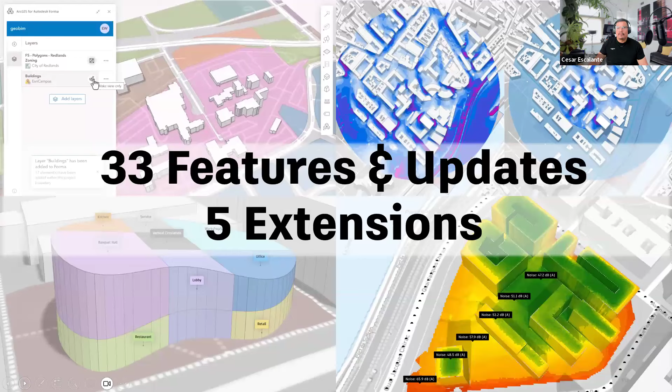All right, this quarter we worked on 33 new features and updates, and 5 new exciting extensions. So with no further ado, let's just dig into it. On the first theme, modeling enhancements. Let's see what's new.

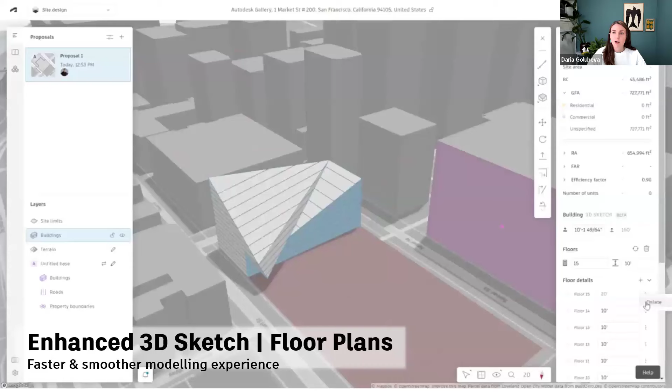Daria? Right, so I'm very excited to start with introducing one of the many updates and improvements that were added to 3D Sketch. So up until recently, 3D Sketch was accessible as a sub-mode from our design toolbar, but now we've made sure to provide you with a more smooth design experience. And it's a ton of improvement to the performance, faster loading times, and just everything to make you more productive when working with this conceptual design tooling.

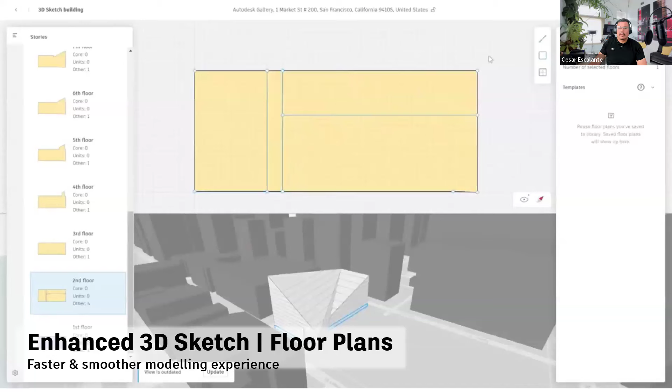And one of the updates that I think is the most valuable is the ability to add floor plans to 3D Sketch buildings. Would you like to add a little bit of flavor to that, Cesar? Yeah, this upgrade improves your ability to represent your program and access more granular metrics, because you can now display what the different spatial requirements are going to be in a floor plan.

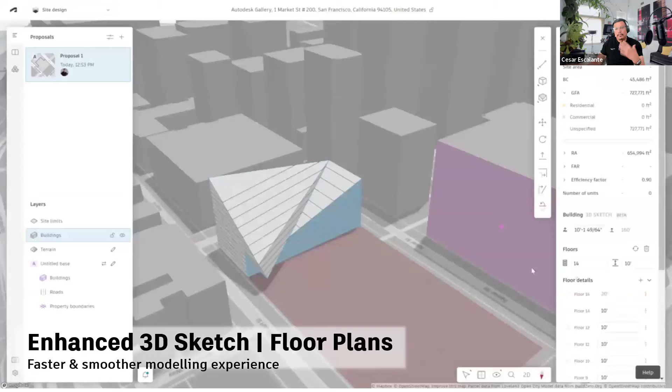You can apply it via floor templates and start understanding the relationship between the floor plan and the exterior skin. And this deeper integration of 3D Sketch means that you can launch projects faster with more consistent graphics and better tooling. And we're very proud about providing you a higher experience in modeling.

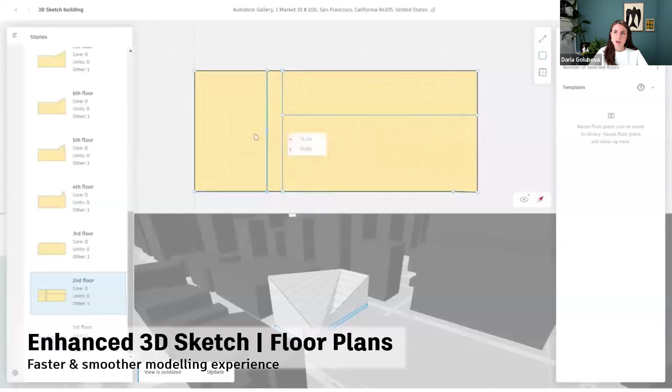Yeah, I wanted to add that previously it was only possible to design floor plans in basic Forma buildings, and we got a lot of feedback that our customers were struggling a little bit with the data loss when converting basic buildings into 3D Sketch, but that's not a problem anymore because floor plans are now part of 3D Sketch buildings as well. Absolutely.

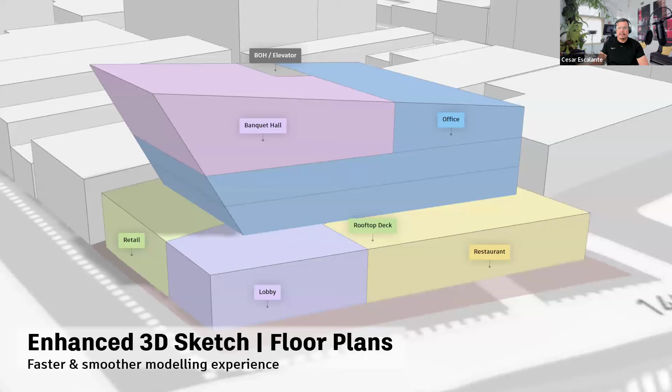That also means that you can create this type of stack representations that are really appealing for communicating design vision with customers. These type of color stack diagrams representing the different programmatic areas of the building are now possible to visualize not only in 2D, but in 3D, and help you understand the vertical and the horizontal relationship of the different space requirements. Take a look, play with it, yeah.

Here is another one, since you can now edit Rhino imports in 3D Sketch. Since we introduced the Rhino plugin, you've been able to use Rhino fluid modeling capabilities and import it into Forma. But the imported elements were a static mesh, and it was incompatible with the parametric capabilities that Forma offers.

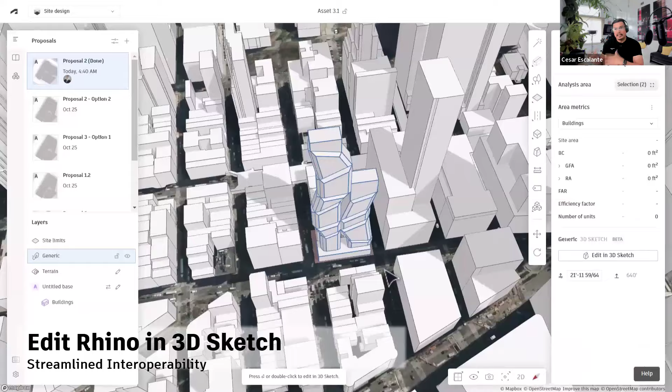But we heard your request, and now we're excited to announce that you can convert an imported Rhino element into a 3D Sketch, and you can take advantage of the full features of 3D Sketch, like adding floors, assigning uses, applying floor plans, calculating area metrics. This is massive, in my opinion, because you can use Rhino as an authoring tool and continue your analysis and metric refinement in Forma.

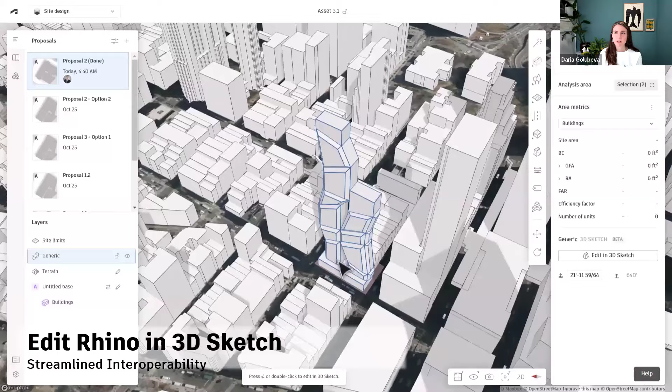I think this is a very exciting update because I see it as a time saver that stands on the intersection of modeling improvements and improvements related to interoperability. And as you said, it will support the downstream operations, such as getting statistics in area metrics and taking advantage of the analysis, and combined with the previously presented updates, you can enrich Rhino buildings with floor plans, which I think is quite exciting.

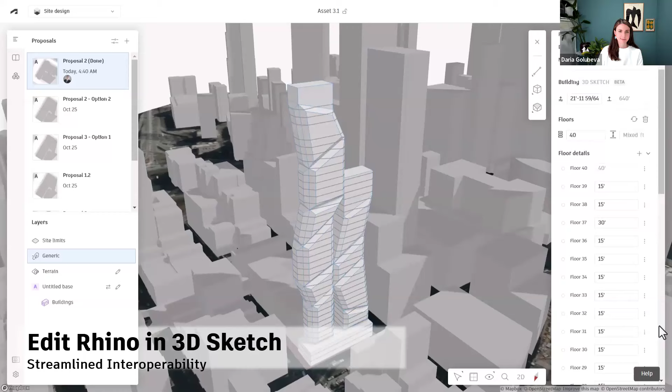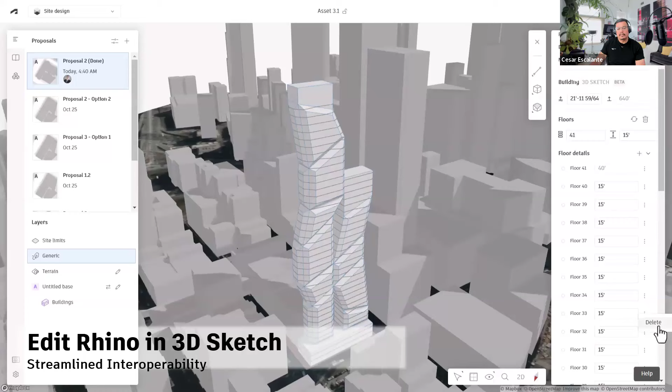There's a nuance requirement. I think the import needs to be a closed manifold geometry to take full advantage of the features. If you, for example, just bring a set of disconnected planes, I don't think 3D Sketch is going to recognize it as a closed solid, so just make sure that when you do this, the Rhino model is properly set up.

There's also a few additional modeling enhancements. You can resize the 3D Sketch solid primitives before placement. These allow you to adjust the size of the basic shapes in the initial state of the modeling, and you can adjust it later on. Another thing, you can delete individual 3D Sketch floors. Previously, it was a bit of a hassle because you needed to adjust floor heights manually using push and pull operations, but now you can simply delete the floor.

And third, we have made significant improvements in the snapping performance when modeling, with a 20-times increase in speed when you snap to certain elements, making the modeling experience faster and more responsive. Kudos to our conceptual design team.

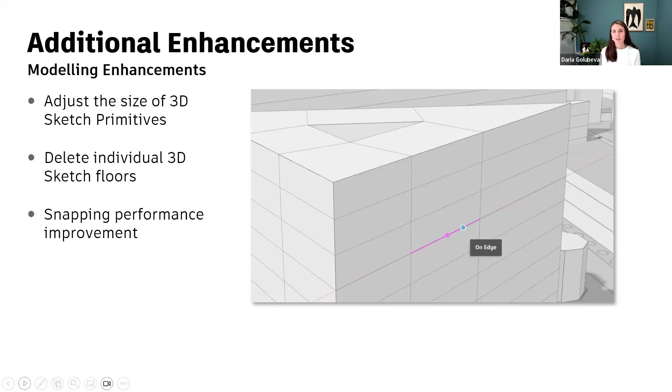And I think they labeled this as a tiny improvement, but I think it's quite a handy, even though small, productivity improvement. When drawing with 3D Sketch tools, you can now switch between the tools on the fly. You can either use the toolbar or a shortcut so that you can create continuous sketches without losing momentum, because sometimes it can be just annoying. Where is that tool? So now just use a shortcut and have this continuous tooling experience. Exactly, and expect more of these enhancements in the upcoming quarters as well.

Sorry. All right. Super exciting, something that was announced in Autodesk University. If some of you were lucky to attend it, I wasn't, so I had massive FOMO watching the keynotes and other presentations virtually from Norway.

But it was announced that Forma is now integrated with Autodesk Docs, and our own whiteboard solution, Forma Board, is pioneering this integration. So until recently, it was possible to paste a link to a file from Autodesk Docs, but now you can also use the handy file browser to choose a file, and then it will be represented on your whiteboard as this very visual thumbnail that you can also open from the board.

That's right, Daria. And this is just the beginning of our strategy to create a seamless experience between Forma and the Autodesk Construction Cloud. Stay tuned for more exciting integration coming up. And by the way, if you haven't checked out Forma Board yet, I think now is the time.

As I mentioned, it's an interactive whiteboard where you can pull different context pieces. So for example, analysis or snapshots of your proposal, and now files from Autodesk Docs to put together this design story, or present to your stakeholders, or just highlight the key parts of your process that you think would be interesting to share with your stakeholders.

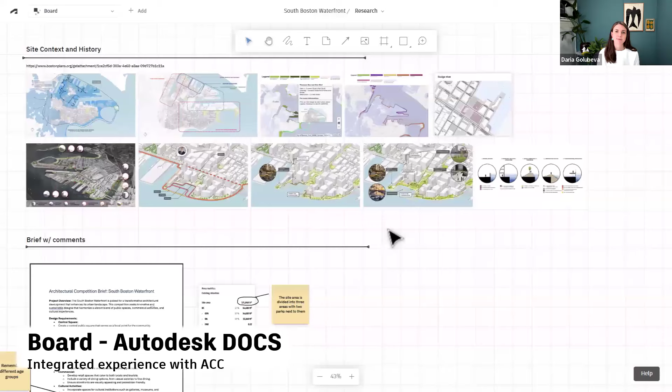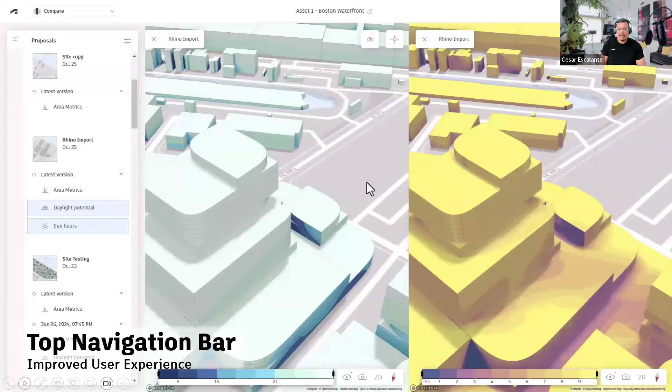All right, as we prepare to transition from Forma the app to Forma the platform, we introduce a new top navigation bar designed to be more intuitive and more user-friendly, and help you to switch workspace between all the different Forma display modes, like board, site design, and analysis compare. I think this is the start of a much richer navigation experience as we expand Forma capabilities.

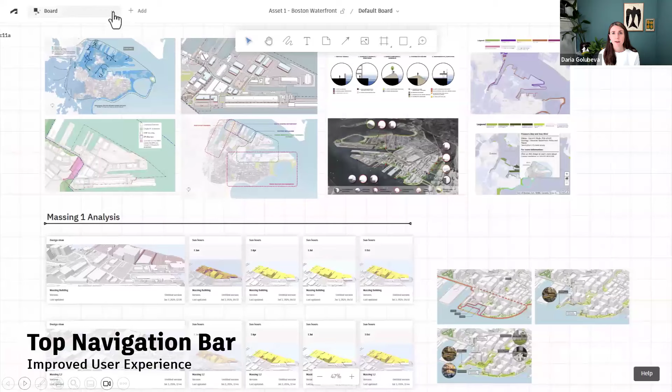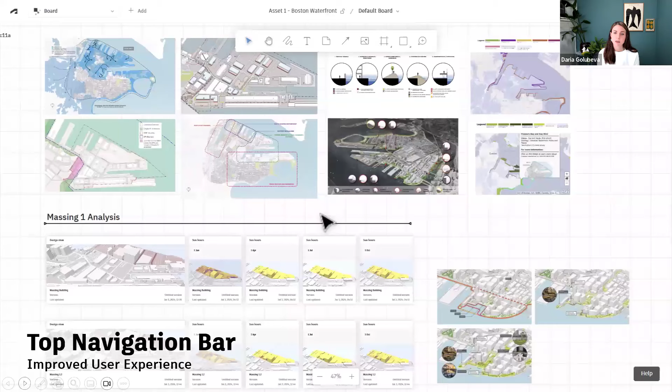Right. So now this, what we call the mode picker in the upper left corner, will help you access different product areas much quicker, and we're preparing for a more scalable solution as we will connect to more tools out of Forma. And there are some more navigation changes that are lined up, but I just wanted to comment that we're trying to release it gradually so that you don't have to relearn workflows or get introduced to a button that was placed somewhere else suddenly.

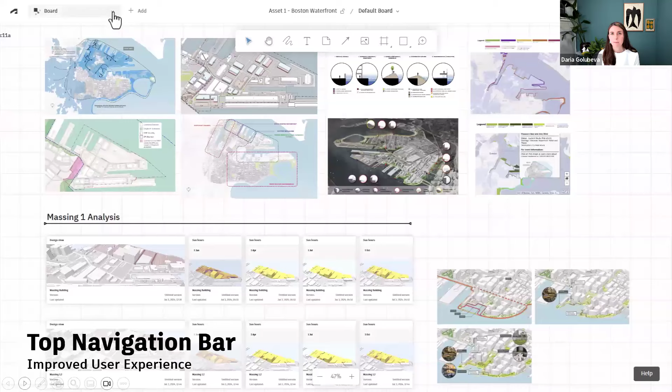So we will be sending in-app updates to gradually introduce you to these changes, and you can get accustomed to them. This is the first step in a bunch of updates in the Forma navigation that will hopefully make it even easier to go between different parts of the product interface. Such a good improvement. Great. Let's take the next one.

We make it easier to collaborate and communicate with board, but now we can add comments directly on the board space. You just pick a point in the board environment and leave detailed feedback and suggestions where they matter. The other thing is that you can also mention team members by using the @ symbol to mention a specific team member in the comments. These members will receive a notification via email.

This makes the design process more efficient by tracking conversation and keeping a history of the conversation on a side panel. Right, and as I mentioned, the board is all about storytelling, and it's about sharing your design process with others. So we hope that comments and mentions will enhance this collaborative offering. And in this sense, I would say that Forma board is becoming this flagship collaborative space within a Forma project.

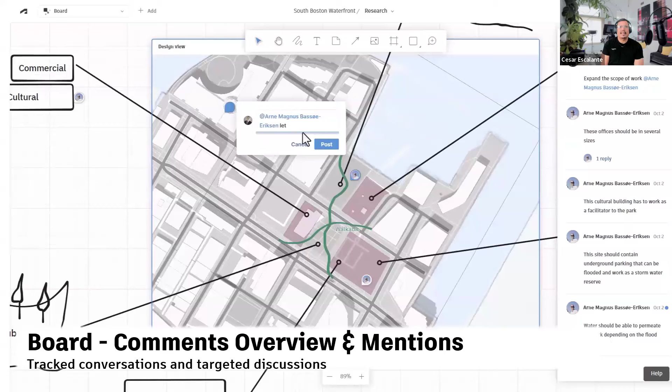And now you can also invite someone to have a look at your board by tagging them in a comment. This is reminiscent of the Microsoft review comments, where you can tag a person and draw a colleague's attention by sending them an email notification. We do this all the time, right, Daria? Yes, indeed. And it's important to get some context about what's being discussed so that when you jump into it, you get all the details and you're prepared. Yeah.

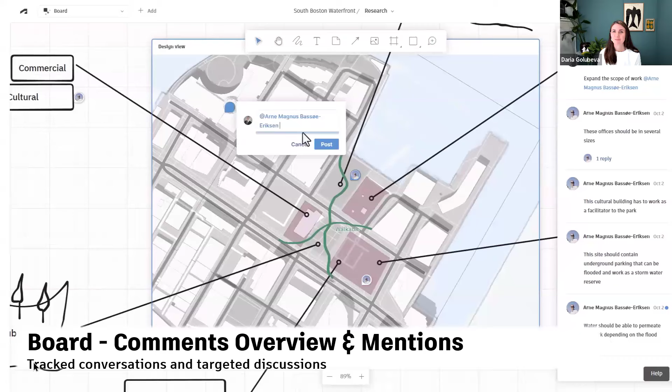All right. Project invitation messages, Daria. Right. Speaking of context, that ties in nicely to the previous point. We added a small improvement, but I think it can be very useful. So when you're inviting a new member to join your project, or if you would like them to look at the board within your Forma project, you can add a custom message that will be included in the invitation email. So for example, what is it exactly that you would like them to have a look at? And by that, you provide the context that will prepare them before logging in to Forma.

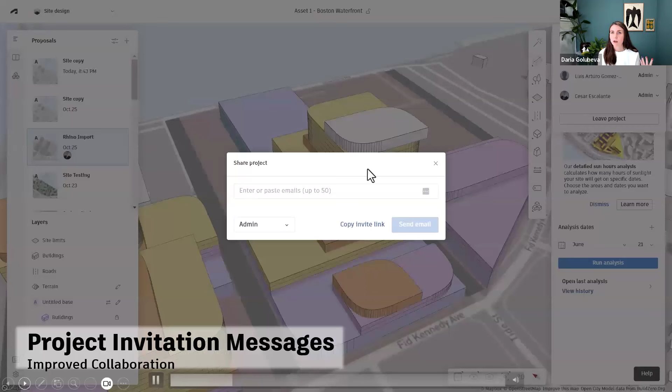And I must say that I really appreciated that as a user when someone on my team wanted to test a feature with me, and they sent me an invitation that included a note. Even though I had a look at that a couple of days later, that immediately brought back the conversation that we had. So I knew exactly what I was expected to check out in that project, and I found it very helpful.

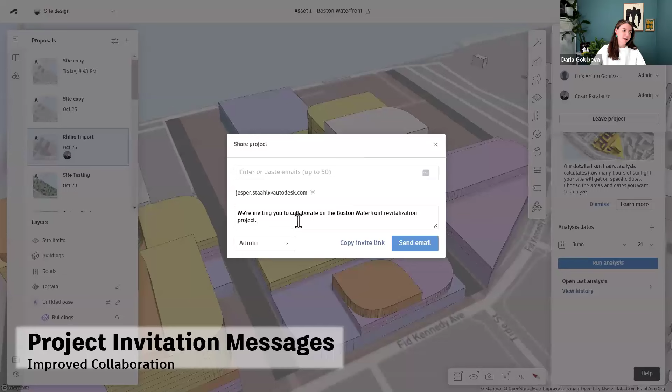Yeah, and who doesn't like to receive a personal touch in your invitations, right? I think it improves the collaboration, team spirit. Yeah, I think it sounds a little bit more like a natural work conversation rather than that email coming from a brand. Correct.

All right, let's take a look at additional collaboration updates. This is a nice one, the ability to duplicate a project from the projects tab in your hubs page.

Maybe I could add a couple of words about that, because it was something the product team I was on worked on. It was a common request because sometimes you might want to reuse parts of your project almost as a template, or sometimes you'd like to share projects with different groups of people, and duplicating the project allows you to quickly prepare for these use cases.

Nice. The other one is that when you create a new board, it displays a starting template. It makes it easier for new users to get started on board features and set up projects from the start. And then the last one is that you can also choose different aspect ratios for your frames, to customize your presentation layout for different device screens or control different print formats.

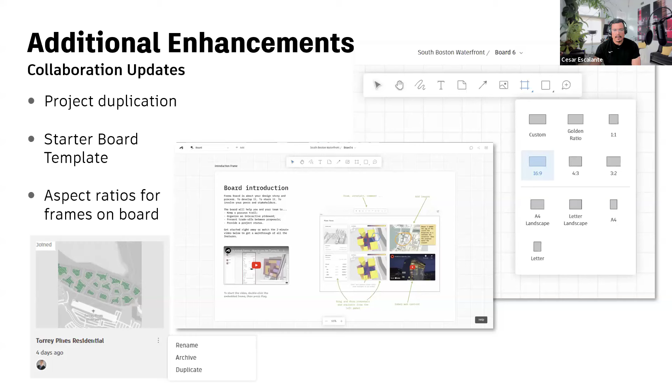We are listening to your requests and adapting these Forma enhancements accordingly.

All right. Next section is just as exciting. Exactly, analysis and simulation. There's a bunch of improvements. Let's take a look.

We're starting by announcing that our noise analysis has graduated out of beta. I know beta might be a bit of a technical term, but if something graduated out of beta, it means we have higher confidence that it performs better, and we've spent extra time and effort validating the results as well as improving performance. So noise analysis is there to help you make the right decisions by taking noise conditions into account.

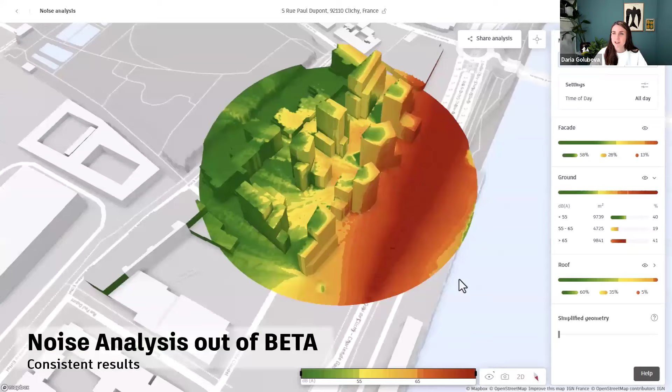Yeah, and this is one of my favorite analyses. I think as a designer, in early stage design, you can speak very confidently about some noise predictions in your design without needing to involve a sound specialist or a traffic specialist.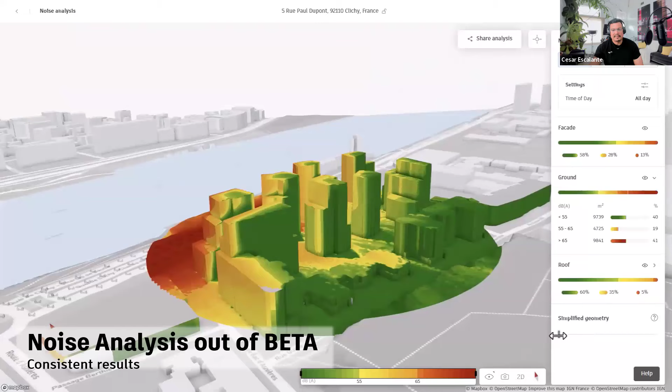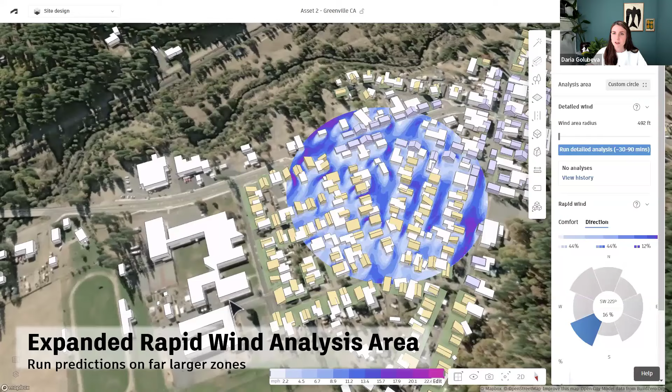By the way, just recently we added some instructions in the noise analysis. So if you haven't used it before, you can check out the steps, because in order to use the noise analysis you'll have to add the traffic data, but we tried to communicate it as simply as possible so you can just complete those steps and get going with this analysis.

Back to you, Cesar. Yeah, rapid wind analysis - we have increased the prediction accuracy, which allows us to increase the target area of the analysis as well. Now the target area is almost a 2,300 foot diameter circle. This is particularly useful when analyzing large scale projects with various different wind conditions.

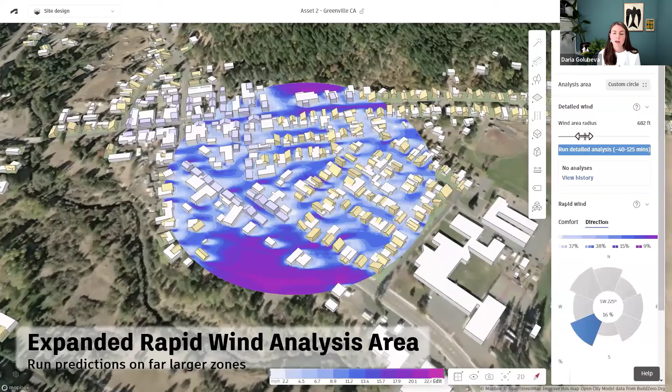Could I take 30 seconds to briefly talk about rapid and detailed analysis, in case someone is new to Forma? Sure, I'll do that. In Forma, there's a bunch of analysis we call rapid analysis. They update in real time while you're making design changes to your model. This allows you to get directional input into how you might modify the model further. It's less precise, but immediately accessible in the right panel, and can inform your further design decisions.

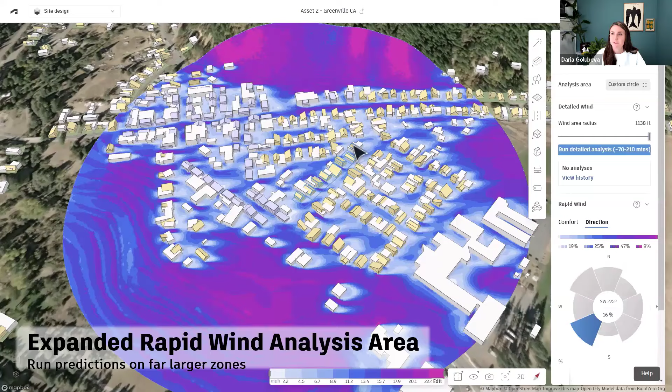And for in-depth results, you might want to use detailed analysis - that's correct, and this is different from the detailed analysis, right Daria? Yeah, correct. Commonly, the detailed analysis takes a longer time to complete, and the calculation is based on a different model. But if you click those question marks in the right panel, you can read up about the specific technology, written by our product teams in a very comprehensive way.

On the daylight potential analysis front, we've improved the daylight analysis tool to allow for more granular statistics. You can now click on a surface and display the daylight metrics impacting that particular surface. We've also introduced a detailed analysis statistics panel that helps you compare quantitative results more easily, and the ability to filter results by different surface types, like floors, roofs, facade, and other - 'other' being surfaces that are not either vertical or horizontal.

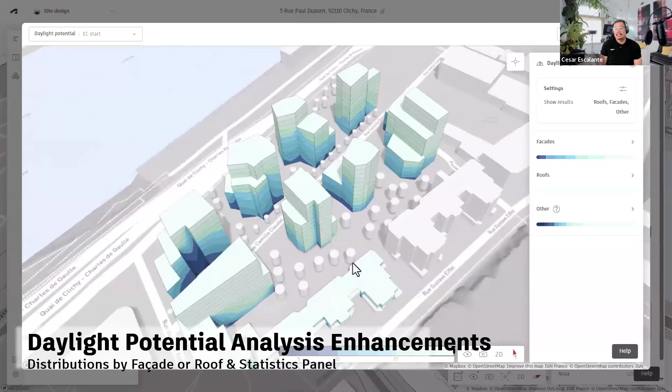This is the type of feedback you may need to be very specific about the type of facade system you need to design, or to optimize window placement in your building. Having the statistics in the right panel was a request we heard from many of our customers, and we made it happen - previously the daylight potential analysis results were just a visualization on the model, but now you can get specific numbers, and communicate analysis results to stakeholders even if they're not a Forma user.

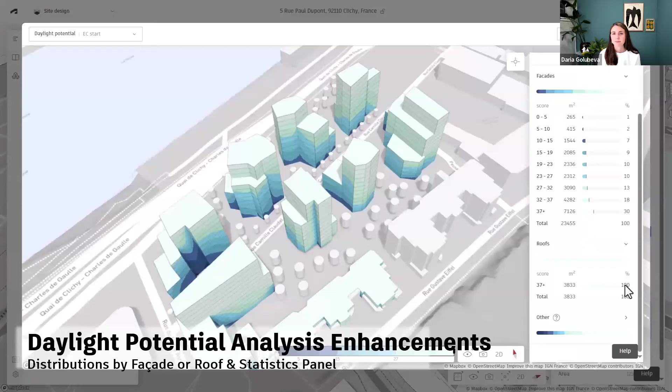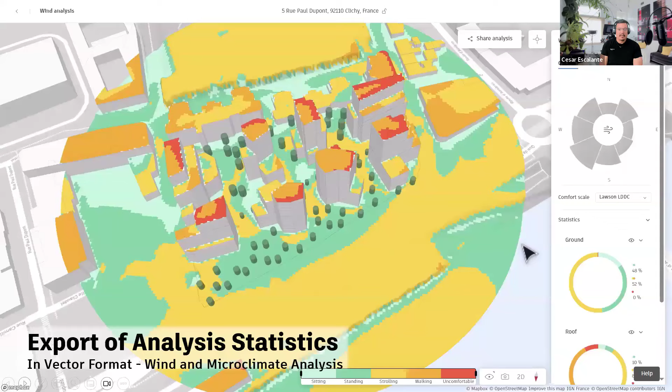This is a minor but very impactful feature: the ability to export wind and microclimate analysis results as SVG or PDF files. This allows you to extract the analysis results and integrate them into downstream documentation workflows. For example, if you're using Adobe Photoshop or InDesign, you can move those analysis results and create custom reports and presentations, ensuring your analysis results are clearly communicated. And because they are in vector format, the quality of the images is very high.

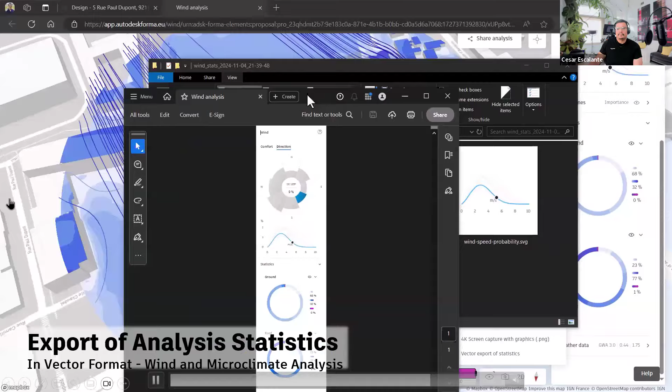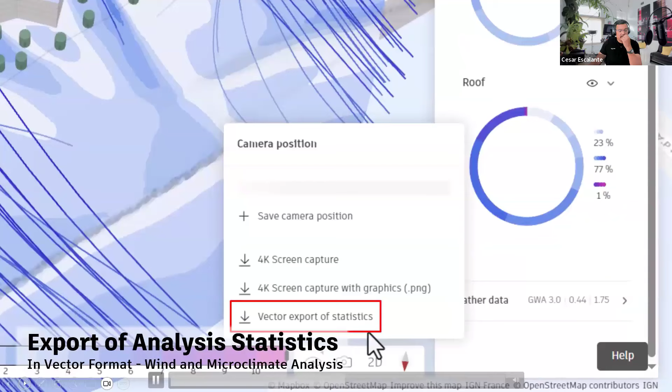Just to add to this video that you prepared, Cesar, the button is located in the toolbar in the lower right corner. Don't worry, it'll be downloaded as a zip file, but you'll find the exports you need once you unarchive that. And you know that if you print a PDF, it also comes with the vectors embedded.

The embodied carbon analysis, introduced earlier this year, now recognizes connected buildings. It accurately calculates embodied carbon emissions for building representations that are multi-structure, ensuring a more accurate simulation. This is particularly useful for large developments where you have a mix of building programs and building construction systems that are interconnected. This also enhances our offering for more accurate calculations on the sustainability side.

I'll give a little backstory, which is interesting in the sense of making Forma understand the nuances of design intent. The reason we introduced this change is that many Forma customers often designed or stacked separately drawn buildings on top of each other, or drew them side by side. Previously, the embodied carbon analysis interpreted them as separate buildings, but the intention was to show that they're parts of one connected building, whether they shared a structure and whether we were correctly calculating the external envelope area. Now this is taken into consideration, and the embodied carbon analysis has learned to understand these nuances.

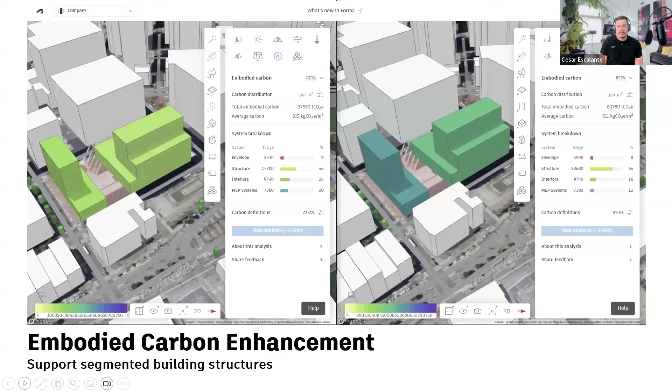Credits as well to C.Scale, the partner that helped us develop this analysis.

Another nice addition is the ability to run microclimate analysis on the roof. This helps us, for example, understand how rooftop gardens or solar panels on the roof impact the microclimate of your building. It shifts the analysis result off the ground to the horizontal surfaces on top of the building. I think it's a nice and handy sustainability update, and I hope to see more of those in Forma.

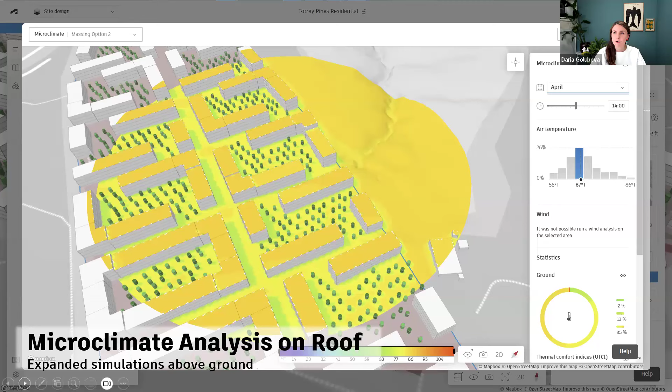Before we jump into integrations, we haven't included it in the slides, but I wanted to quickly comment on operational energy analysis. If you've been using Forma for a while, you might have noticed that it was removed. As I mentioned, we put a lot of time and effort into validating analysis results and making sure the data you get is accurate and reliable.

What we observed with the operational energy analysis, based on a model developed way back, is that it no longer responded to the changing needs and designs of buildings we've observed among Forma customers. In a way, the underlying model behind this analysis was trained on building geometries that were no longer representative of what we see in Forma designs today. So to make sure we do not provide unreliable data, we made the decision to remove this analysis.

We will focus our efforts going forward on building operational total carbon analysis that will provide more flexibility in terms of geometry. This is a continuous process of making sure we validate the data and ensure it's accurate and reliable. For us, it's important that customers trust the analysis results and that they provide accurate predictions as much as possible.

I think we're still in the Autodesk universe, and this was also announced around the same time as Autodesk University. I'll make an introduction, then the stage is yours, Cesar, to talk about what it means for our customers. Dynamo is now available in the cloud, Dynamo as a service, providing a much easier and smoother authoring experience. If you're creating Dynamo graphs, I think you'll definitely appreciate this update.

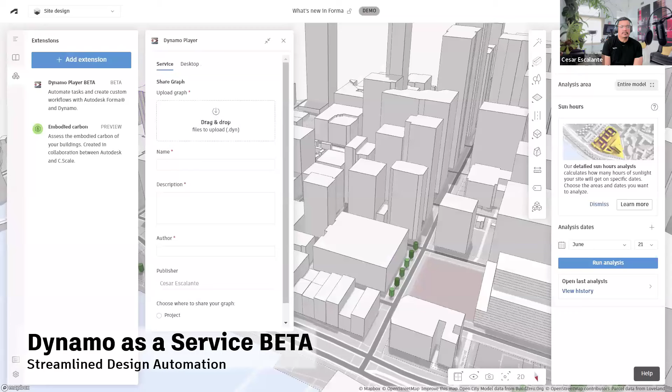I think the major value proposition here is that you no longer... you can share your scripts on a project basis to all users, and you're no longer connected to a manual path on a localized machine, which basically enables an entire team to access customization workflows.

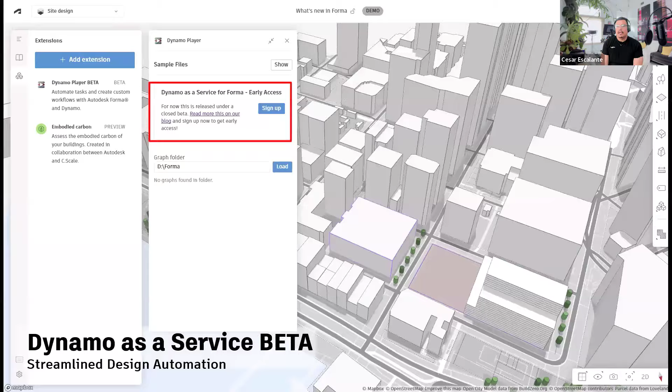The new service is compatible with Dynamo Forma Beta Package 2.0 or Dynamo 2.18 and later, and it's available for Revit 2025 and forward. I think this package enhances our ability to use computational design workflows in our design studies.

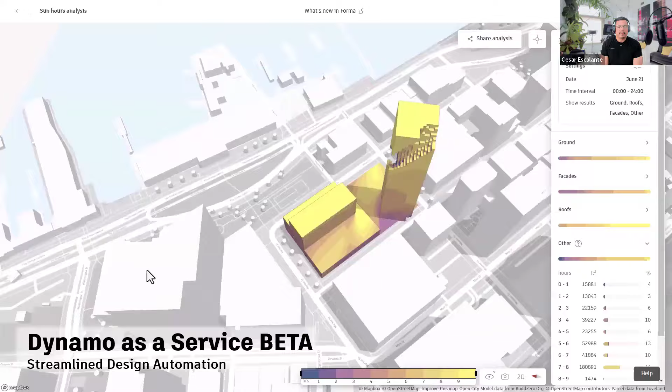And the other thing that's super nice, Daria, is that the geometry generated in Dynamo is represented as native Forma elements, and is compatible with all the Forma features like 3D Sketch, where you can continue modifying and calibrating your design exploration. To sign up, you can do it directly from the Dynamo Player add-on.

You have to join the Dynamo Forma closed beta, where you will receive an email with a link explaining how you can access it, and upload your script to the service and play with the different inputs.

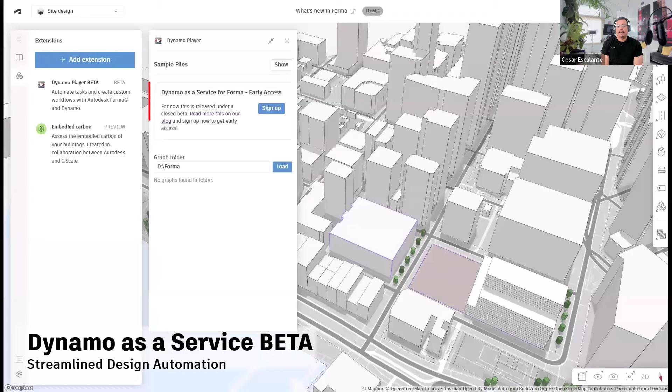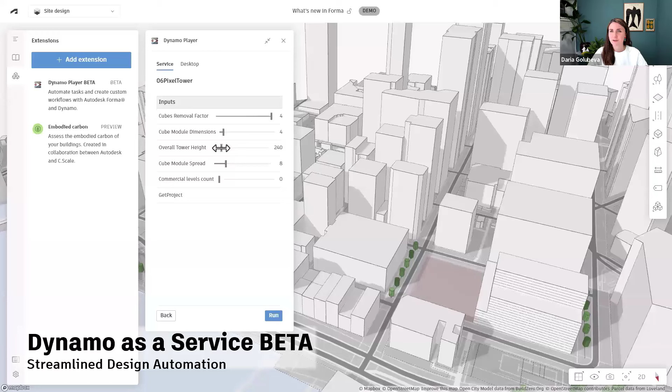So check it out and let us know how you can get value out of this. I'm very excited about this addition, it's fantastic to see it in action. This is not something I'd be able to experience as a user, it gets too technical for a content strategist, but I love seeing what it means in practice, and I'm excited to hear about the, I'm pretty sure, very diverse use cases this will unlock.

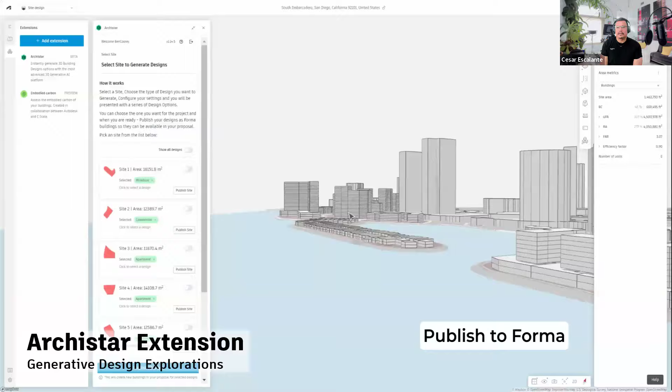All right, Archistar has developed a new extension for exploring generative design solutions that are compatible with Forma. I'm not sure you've heard about Archistar before, but it's a web service designed for architects, urban planners, and property developers that allows you to generate and optimize 3D designs, supporting different types of developments including low density housing, medium density apartments, commercial spaces, and keeping track of all the programmatic requirements.

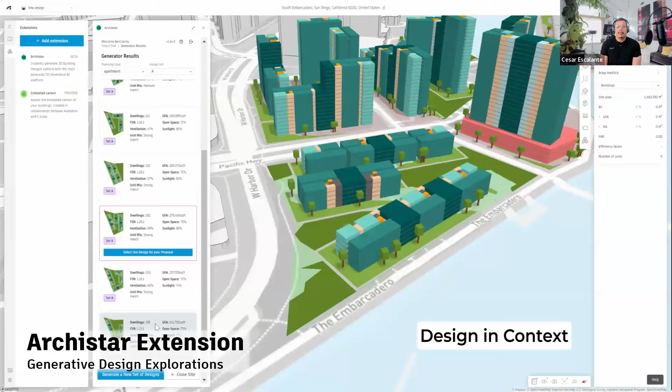Archistar was initially seen as a competitive product for Forma, but one of the strategic directions of our development is to allow people to access and develop third-party integrations using our open API. This is an example of how we expand the market by providing very compelling value with specific types of extensions. So if you think something isn't possible with Forma, stop for a second, maybe there's already an extension addressing that particular need.

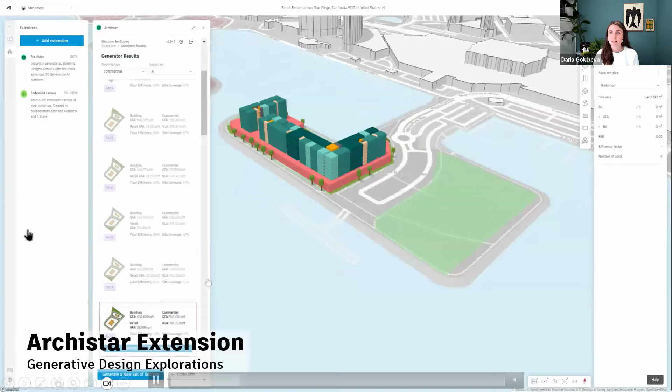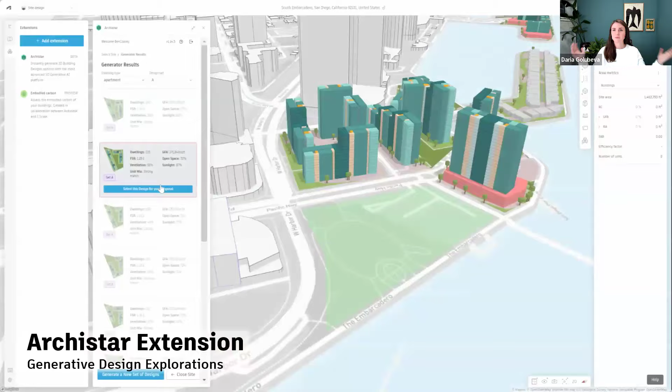And I think there are tons of possibilities for the different use cases it can address. For example, if there's a country-specific analysis that's particularly relevant, or if it's a bit of a niche design process—well, there are tons of possibilities out there. So click extensions in the left sidebar, and you'll be able to browse currently available extensions and start testing them out in your Forma project.

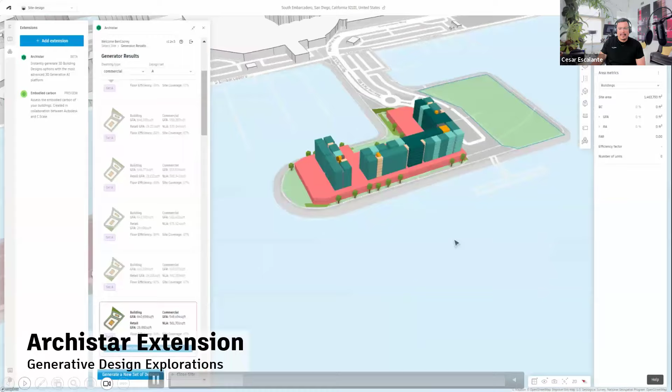I enjoy getting the surprise whenever a new product appears in the marketplace, and love seeing that expansion happening.

This is another one, the InCitu AR extension. This extension introduces augmented reality into Forma-created designs. You can publish your proposals as a location-based AR experience, accessible on-site using a QR code, and available also on iOS and Android devices. This allows you to visualize a project created in Forma in real-world context.

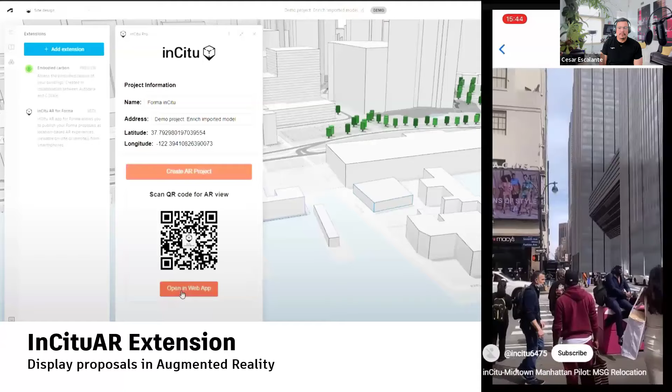So imagine being able to stand in front of your project site and see the proposed building in the actual location through your phone or tablet. Kudos to the InCitu AR team for making this extension happen.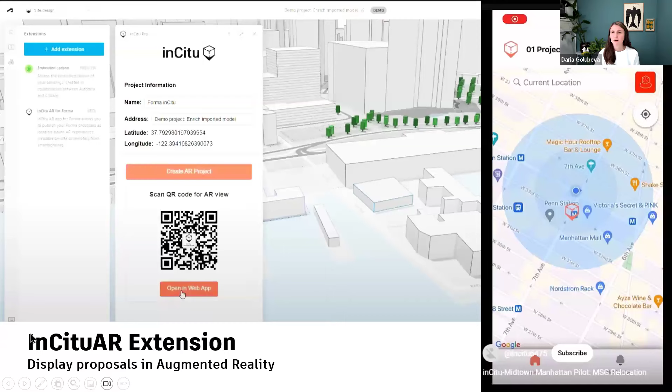I would be very excited to try it out, and as I mentioned, context matters, and seeing is believing—here you get a sense of scale, of what might become something that currently looks like blocks and other geometries, but what it might look like in real life. And I thought of an interesting use case: maybe you can get a screenshot and add it to a Forma board as part of the design process.

This is another one, a very nice one: the Arch-Intelligence extension for terrain analysis. If you're not familiar, Arch-Intelligence is the most famous integration for Revit. It's their landscape solution, and now they have developed a new tool that provides insights on how terrain conditions impact a project.

The tool allows you to simplify the calculation of soil and volume for earthwork and represent the cut and fill requirements. For example, if you are working on a very hilly site, I don't think we have a lot of out-of-the-box tools that modify terrain at the moment. But using this tool, you can actually understand what the requirements are to create a level building pad and help you make informed decisions early on about grading and excavation.

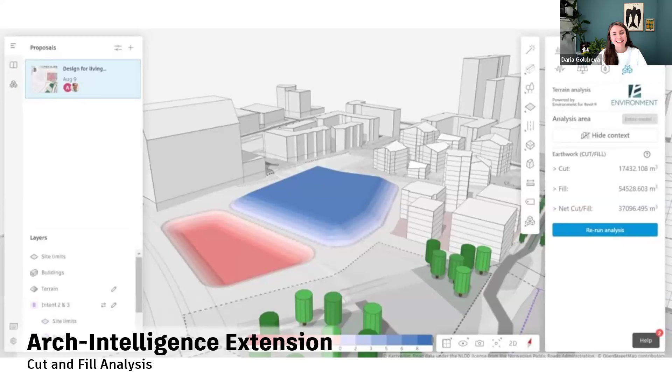Hilly terrain, that's definitely something that would resonate with an audience here in Norway, just thinking about the plot of land my house is on. Yes, thank you. And greetings to the Arch-Intelligence team. They are lovely to work with.

There are also additional enhancements. The Forma add-in for Revit is now in version 0.9.8. The latest version includes fixes like improved levels, matching usage when you apply converted masses, and better property boundary creation methods. And also a new version for the Rhino plugin, 0.7.6, which includes better roads and improved site and property boundary imports. I think these updates make it easier to integrate Rhino and Revit models into Forma.

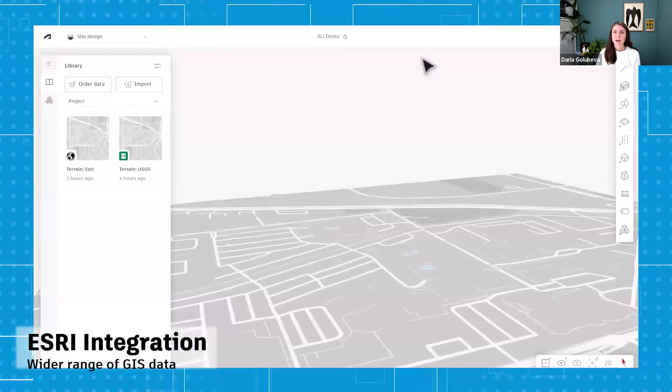And I leave the best one for the end, Daria. So walk us through it. Right. We don't normally talk about things that are not yet live in the product, but this is just too exciting to not talk about. And again, if some of you were lucky to attend Autodesk University, you might have heard that Forma will soon be integrated with Esri, which means you will have access to an even wider range of contextual data around the world.

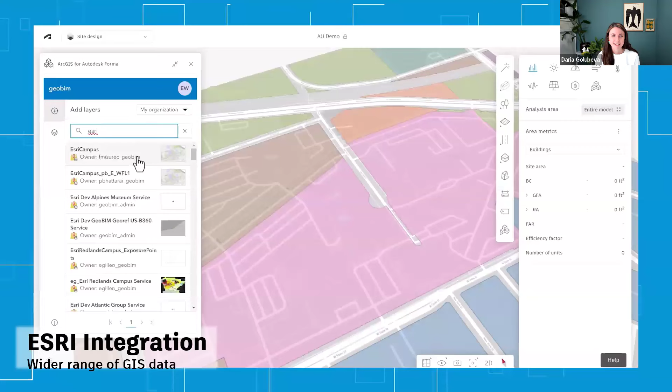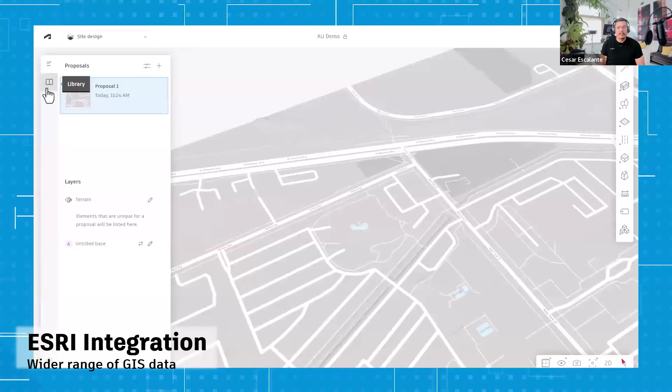Yeah, I think this integration will allow designers to access GIS data that informs design decisions. For example, you can bring zoning information that's available in your municipality and underlay it into Forma, ensuring that your projects comply with local regulation. That's just one of many examples of what designers can do with this integration, and in particular it expands our ability to work with urban planners and urban designers.

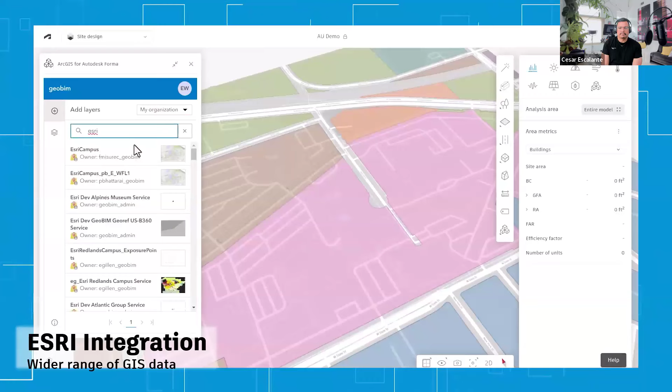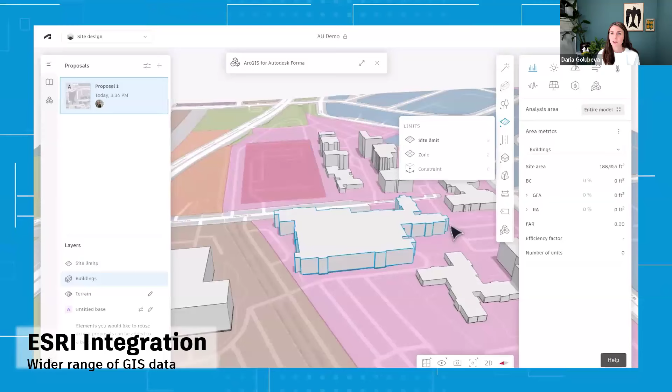Right, and I wanted to add that it's probably one of Forma's strengths, that it allows you to start designing from an informed position. By that, I mean that you have contextual data that places your projects in actual context. And I think this will be particularly impactful in this regard. So stay tuned for more updates.

All right, so this gets us to the end of the presentation. And now let's take a look at some of your questions. Happy to take some of them live.